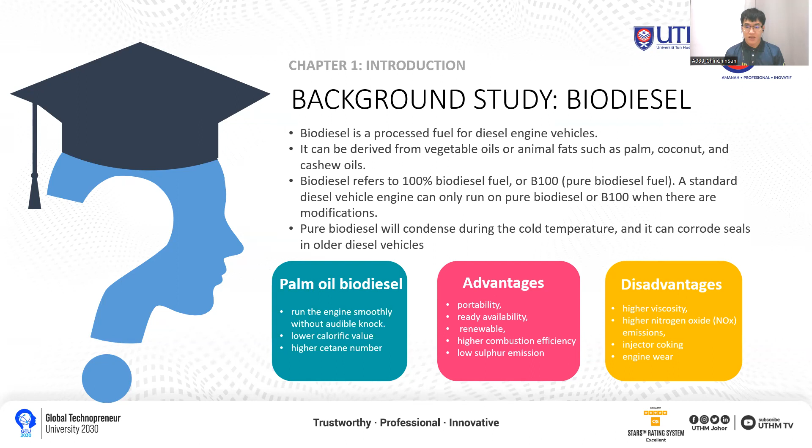Pure biodiesel will condense during cold temperature and can corrode the seals in older diesel vehicles. So the biodiesel that we use in our diesel engine vehicles is called biodiesel blends. It can run the engine smoothly without audible knock, but it has lower calorific value and higher cetane number. The advantages of using biodiesel blends are portability, ready availability, renewable, higher combustion efficiency, and low sulfur emissions. The disadvantages are higher viscosity, higher nitrogen oxide emission, injector coking, and engine wear.

First is the problem statement. A unique frequent stop and slow moving traffic in Malaysia need a clear understanding of vehicle behavior under these circumstances, meaning the vehicle always operates in low load condition. Next is alignment with the National Automotive Policy (NAP) to introduce B30 biodiesel in Malaysia by 2025. So we need to know if B30 is ready to use in Malaysia.

So the research objective is to investigate the performance and exhaust emission by using B10 and B30 palm oil biodiesel blends under low load conditions.

So the scope: first, we're using the chassis dynamometer Mustang AWD 500 in Unitech. Second, we run the vehicle below 40% engine load with constant 40 km per hour speed. The fuel that we use is B10 and B30 palm oil biodiesel. The vehicle is Mazda CX-8 2.2 liter with SkyActiv D technology.

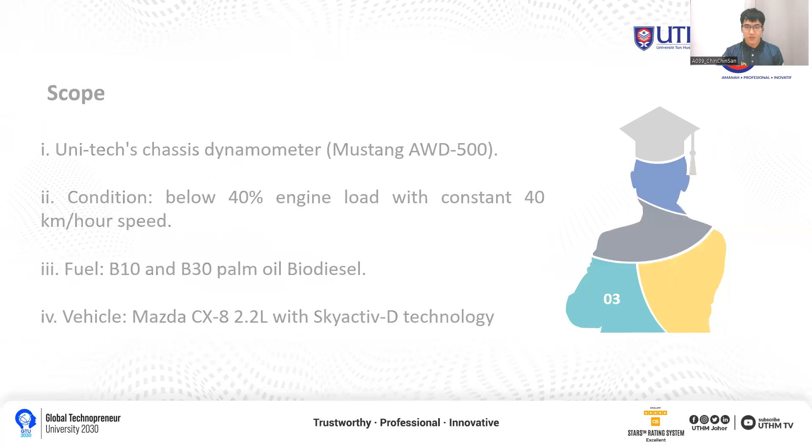The significance of study: first is the performance for B10 and B30 palm oil biodiesel blends under low load condition can be studied. Second is exhaust emission for B10 and B30 palm oil biodiesel blends. And lastly is comparison between the performance and exhaust emission under these two types of biodiesel blends.

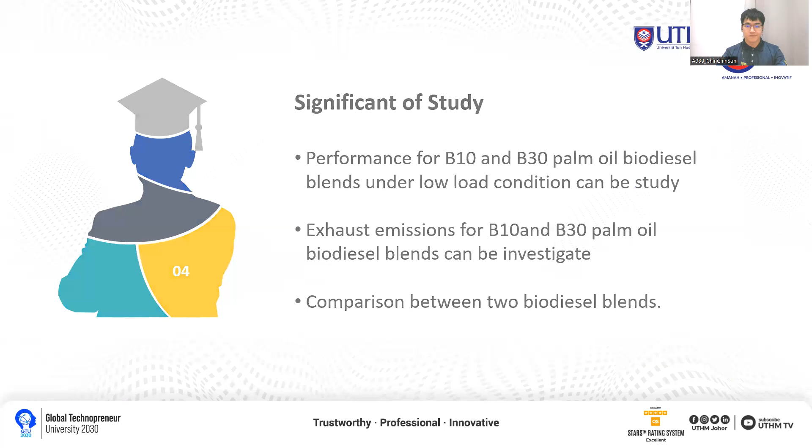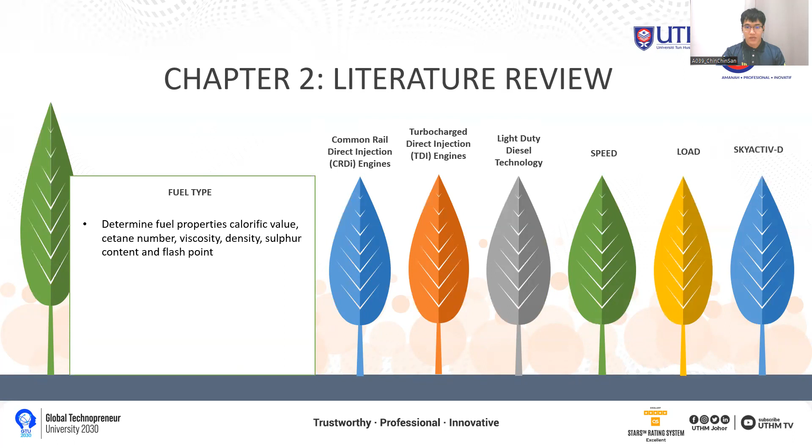So for the literature review, for the fuel type, to determine the fuel properties: calorific value, cetane number, viscosity, density, sulfur content, and flash point. How can these fuel properties affect the engine performance and also the exhaust emission? Next, we study about some vehicle technologies.

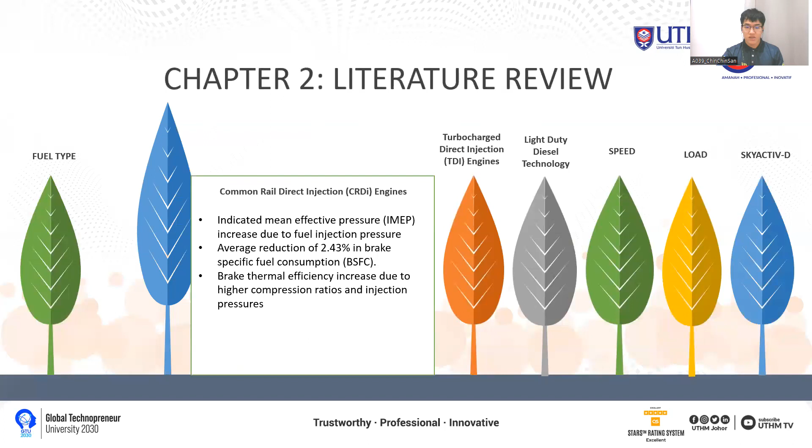First is CRDI engines. So IMEP will increase due to fuel injection pressure. Average reduction of 2.43% in BSFC, and finally brake thermal efficiency will increase due to higher compression ratio and injection pressure. For the turbocharged direct injection engines, low heating value of biodiesel increases the BSFC of the engine. And the total particle number concentration decreases when we use biodiesel blends in TDI engines.

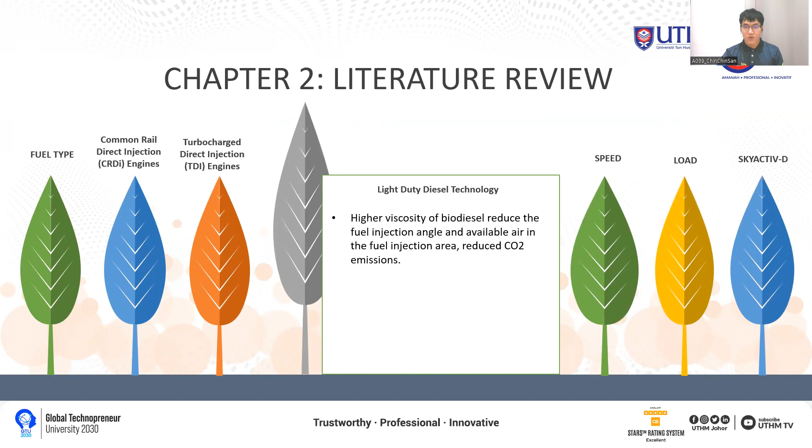For the light duty diesel technology, higher viscosity of biodiesel will reduce the fuel injection angle and available air in the fuel injection area, which can reduce CO2 emissions. Under the speed conditions, when the engine speed increases, brake power, brake thermal efficiency, and brake torque will increase. Higher emission of HC and NOx at lower speeds for all biodiesel blends.

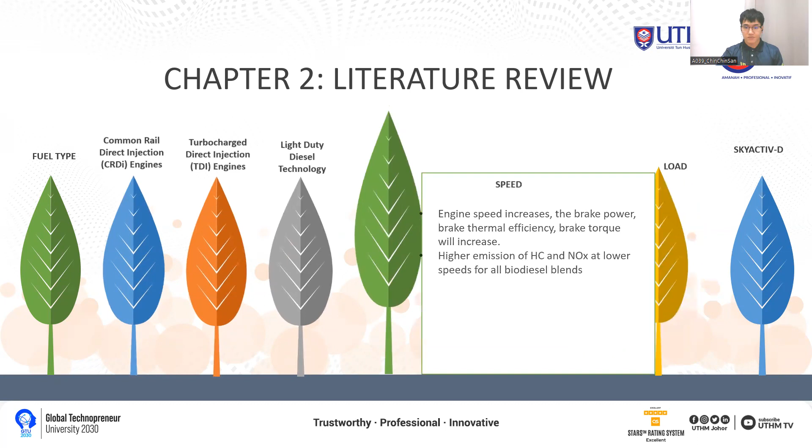For the load condition, when the vehicle is in high loads, it will increase the air-fuel equivalence ratio resulting in an excess of oxygen, which can lead to more complete combustion and improvement in engine output power. So under low engine load, the specific fuel consumption (SFC) values for biodiesel mixtures are lower than pure diesel fuel. So the emission of carbon monoxide will show a decreasing trend from 0 to 75% load.

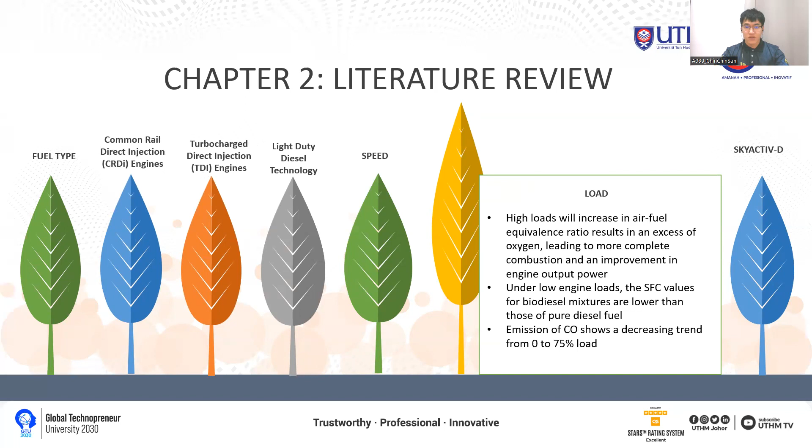Lastly, we study about the SkyActiv D technologies. It has the lowest compression ratio, 14 to 1, for 20 to 30% better fuel efficiency. So with the SkyActiv D technologies, the vehicle does not use the expensive NOx after-treatment system. It has a new two-stage turbocharger for smooth and linear response. Precise injection quantity and timing increase the accuracy of mixture concentration control and ensure cold start capability.

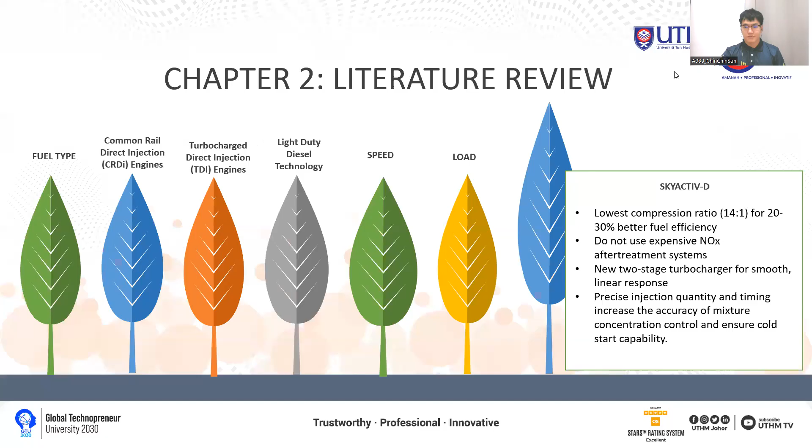So this is some references for my literature review.

So the methodology I divide into 4 sessions. First one is materials and equipment. First one, of course, is the fuel properties for B10 and B30. We more focus on density, viscosity, cetane number, and calorific values for the fuel.

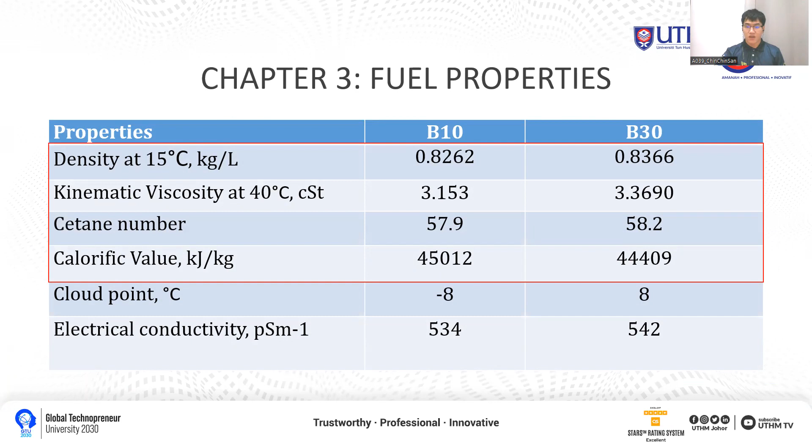Next is the vehicle that we use, Mazda CX-8 with SkyActiv D technologies. This is the engine's specification, and this is another specification of the vehicle. So the engine displacement for CX-8 is 2191 cc with compression ratio 14.4 to 1.

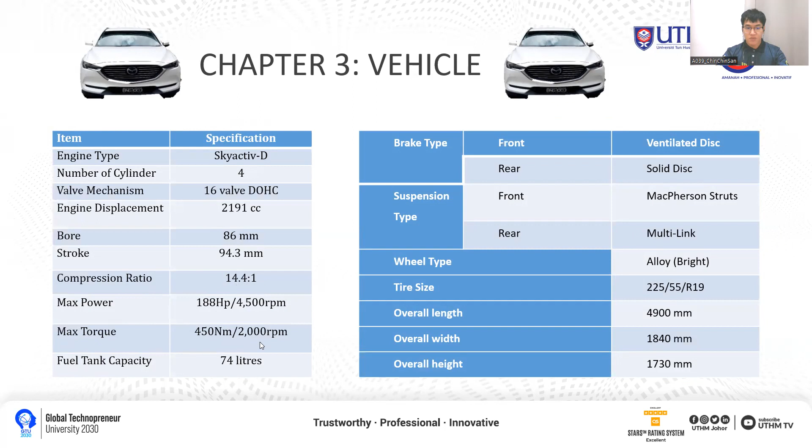The max power is 188 horsepower at 4,500 RPM, and the max torque is 450 Newton meter at 2,000 RPM.

So these are the other apparatus that we use in this experiment. First one, the B30, we can only manually blend because we cannot directly get the B30 palm oil biodiesel from the open market. So we use the biodiesel blending machine to blend between B100 and B10 Euro 5 that we get from Caltex in Pagoh.

Next, we use the Mustang dynamometer all-wheel drive 500 model. Next, we use the KINGBOLEN Bluetooth OBD2 with the aid of Torque Pro application. Next, we use the Bosch BEA 060, which is the exhaust gas analyzer, with the aid of BEA 030 speed measurement, and KTS 515 OBD.

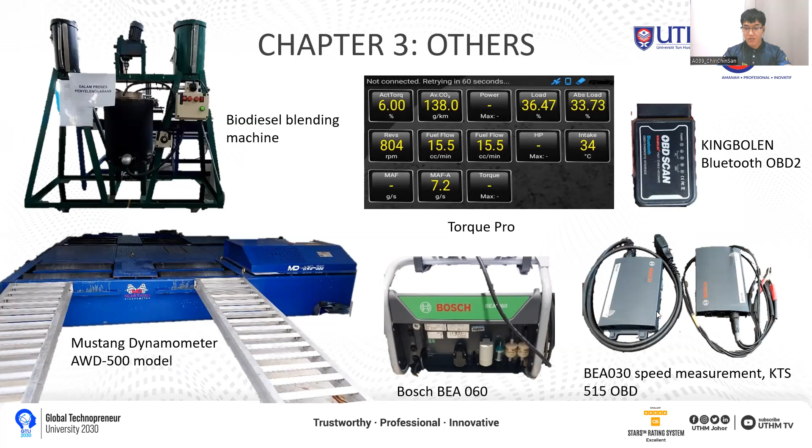So the experiment setup for the pre-experiment checklist, we need to ensure all the components of the Mustang dyno are in good condition. Next, we need to check the vehicle condition such as tire health, tire pressure, engine and transmission oil, plug, belts, and hoses is in good condition.

Next, we need to identify and list the parameters in Torque Pro that need to be logged during the experiment, such as RPM, engine load, fuel flow, and the others.

So next, we need to study the guideline or the manual for the chassis dynamometer software, PowerDyne, emission gas analyzer, and the specific vehicle under testing. Next, we need to ensure all the tools are sufficient in quantity, functionable, and properly connected to facilitate a smooth and accurate experiment.

So next, we need to have good PPE, such as wearing earplugs and safety shoes during running the experiment.

After we check all this, we can park the car on the dynamometer. Then we need to ensure it is centered and straight, and implement cross strapping at suitable points to prevent unnecessary movement when the experiment is running. Finally, we utilize dyno fans to dissipate engine heat effectively during the test.

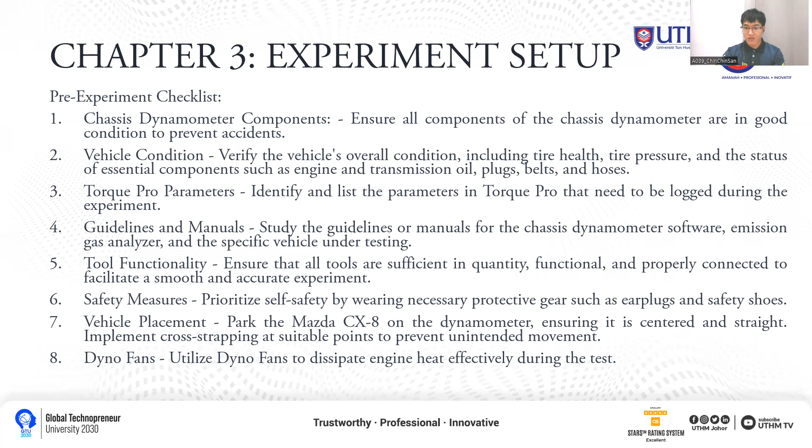During the experiment, we need minimum 3 people: one to operate the vehicle, one to monitor the dyno computer, and lastly one to record and monitor the emission gas analyzer computer.

So we start with the B10 palm oil biodiesel blend first. To run the vehicle under low load conditions, we need to maintain a constant speed of 40 km per hour that can be set at the dyno application.

Next, set the engine load manually to 20% using the Torque Pro through the OBD2. Sustain each load for 10 seconds with a data collection interval of 0.5 seconds.

We gradually increase the load to 25%, 30%, 35%, and lastly 40%, maintaining each load for about 10 seconds. Record the brake power using the PowerDyne software for the dyno, then we collect the engine RPM and fuel flow through the Torque Pro for BMEP and BSFC calculation.

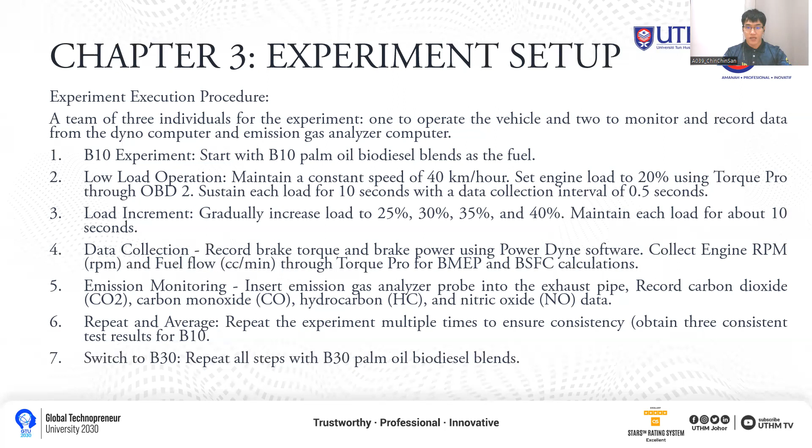This is some results that I took from the Mustang Dyno. As you can see, this one is at 20%, 25%, 30%, 35%, and 40%. The color determines the different tests that we ran, and it's very close and consistent.

So we'll take the 3 data points for these 3 tests. This is for engine power and engine torque.

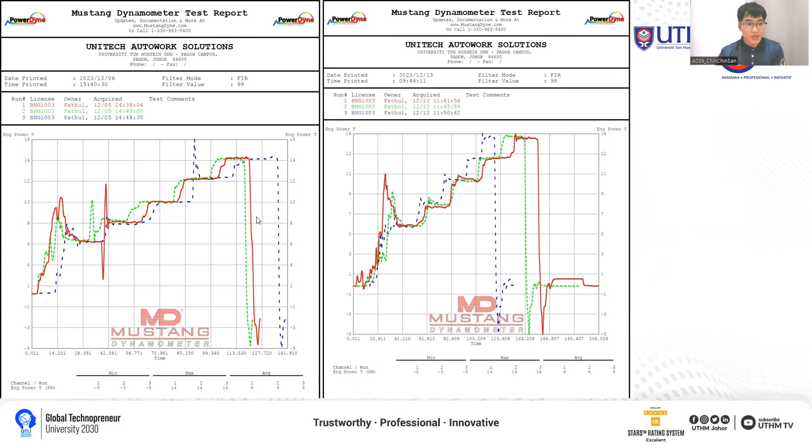So for the data analysis, firstly we use the Excel spreadsheet. We format the collected data into an Excel spreadsheet for organized analysis, emphasizing the key parameters critical for performance and emission assessment.

We need to calculate the average value for brake torque, brake power, CO, CO2, HC, and NO under different engine loads.

And we use the formula BMEP to calculate it. To calculate the BMEP, we need the torque T, N, engine displacement equal to 2191 cc, and N is equal to the number of revolutions per power stroke, where for four-stroke engines N is equal to 2. To calculate the BSFC, we need fuel flow and the brake power.

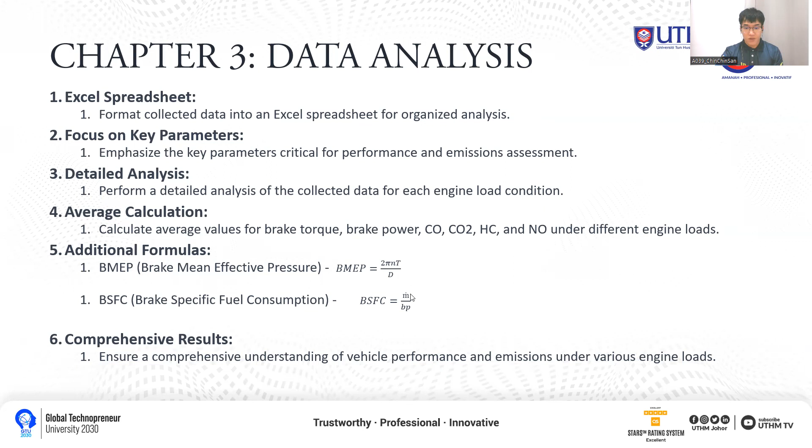So lastly, for chapter 3 is uncertainty, which is the error and uncertainty that may arise from diverse factors such as selection, calibration of instrument, fluctuation, and environmental conditions, variations in test and observation.

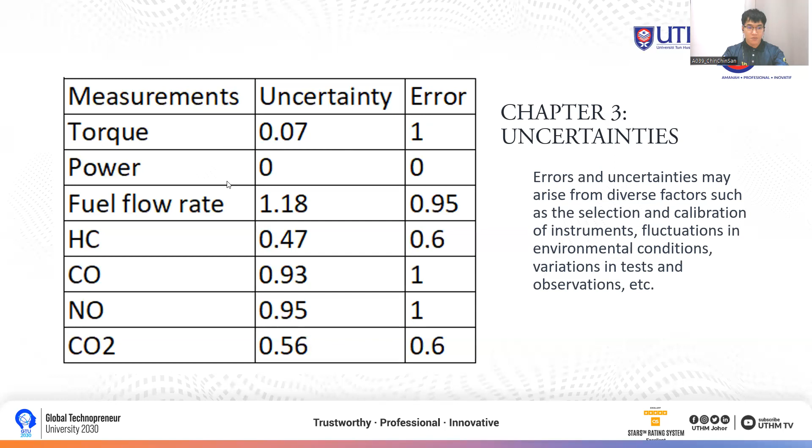This is the uncertainty and error that we calculate: the brake power, fuel flow rate, HC, CO, NO, and CO2.

So this is the flowchart. First, we start with data gathering and we set up the chassis dynamometer to run the experiment. Can it proceed? If yes, we'll run the experiment with low load conditions and take the result, and lastly we finish the report.

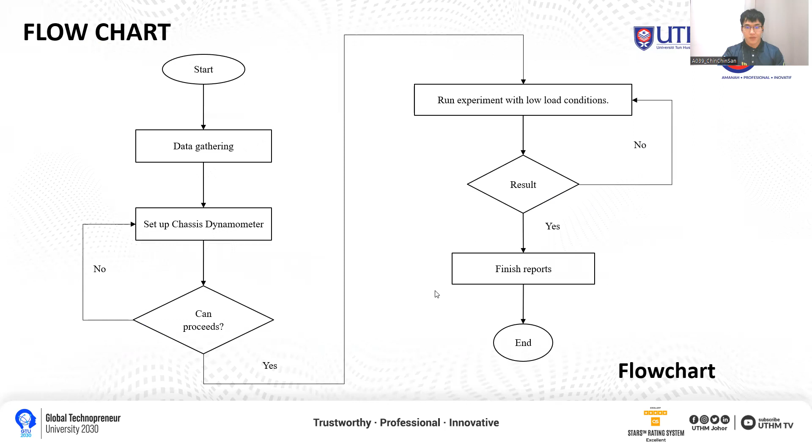So this is the vehicle performance. For the brake torque analysis, the brake torque has an increasing trend when the engine load increases. At 40% load, both B10 and B30 exhibit the highest brake torque value.

So the difference between B10 and B30 at 40% load is about 2.34 Newton meters, where B30 is lower than B10. The lowest brake torque value occurs at 20% load for both fuels.

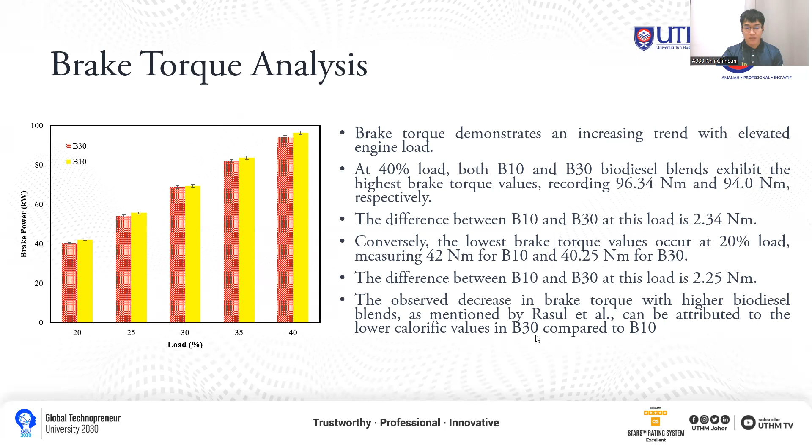So the observed decrease in brake torque with higher biodiesel blends, as mentioned by Rasul et al., can be attributed to the lower calorific values in B30 compared to B10.

For the brake power, it increases when the load increases for both B10 and B30 biodiesel blends. At 40% load, the peak power recorded is 14 kilowatts for both blends, and the lowest brake power is at 20% load.

So the small difference in calorific values and dynamometer sensitivity results in negligible variations between B10 and B30.

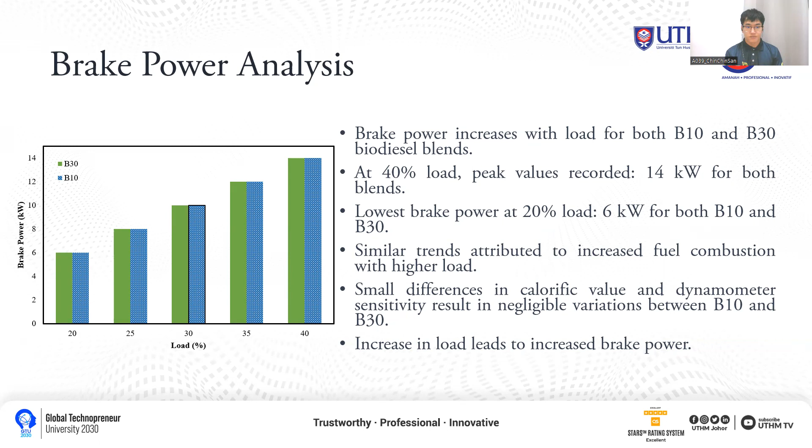So for the BMEP analysis, BMEP will increase with load for both B10 and B30 biodiesel blends. At 40% load, the peak value recorded for B10 is 552.61 kilopascal, and for B30 is 539.20 kilopascal. The difference between both fuels at 40% load is about 13.41 kilopascal.

So the BMEP will decrease with higher biodiesel blends due to the lower energy content, higher viscosity, and also the lower brake torque. Because the formula we use to calculate the BMEP needs the brake torque, so when the brake torque decreases, the BMEP will also decrease.

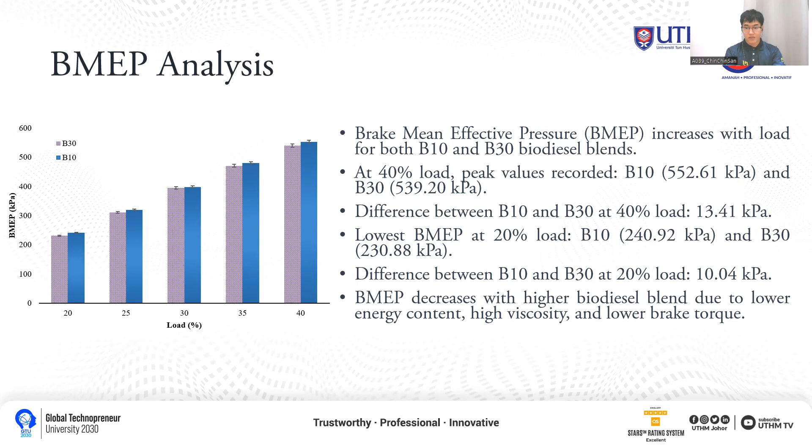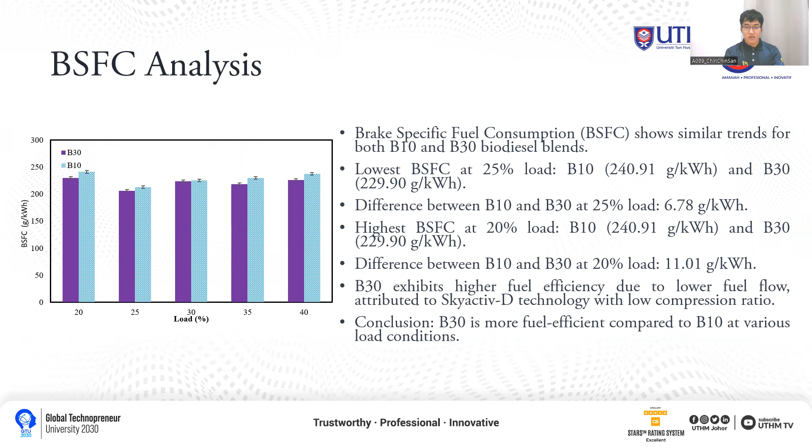So the B30 exhibits higher fuel efficiency due to the lower fuel flow, attributed to SkyActiv-D technology with low compression ratio. So in conclusion, B30 is more fuel efficient compared to B10 at various load conditions.

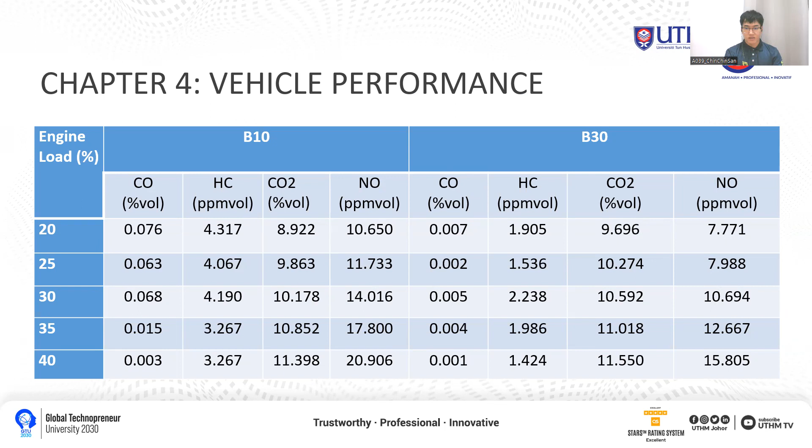Next is for the vehicle performance. This is the data. For CO2, the percentage volume will increase with load for both B10 and B30 biodiesel blends. At 40% load, the peak value recorded for B10 is 11.398 percentage volume and B30 is 11.550 percentage volume. The difference between B10 and B30 at 40% load is about 0.152% volume.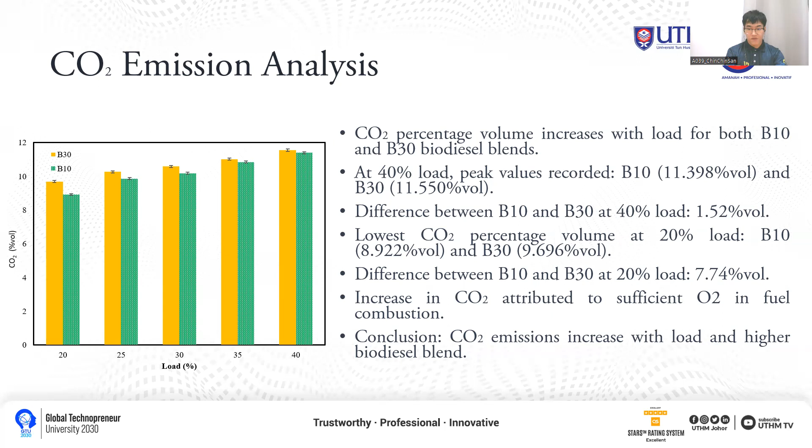So the increase in CO2 may contribute to sufficient oxygen in fuel combustion.

For the CO emission analysis, the CO percentage volume shows a decline trend from 20% to 25%, followed by an increase at 30% and a final decrease at 40% for both B10 and B30 biodiesel blends. At 40% load, lowest CO percentage volume recorded for B10 and B30. The difference between the two fuels at 40% load is about 0.002% volume.

The presence of sufficient oxygen reduces the carbon monoxide emissions, aiding in better combustion when the engine load increases. So in conclusion, CO emission will decrease with load, and higher biodiesel blends cause a decrease due to higher oxygen content.

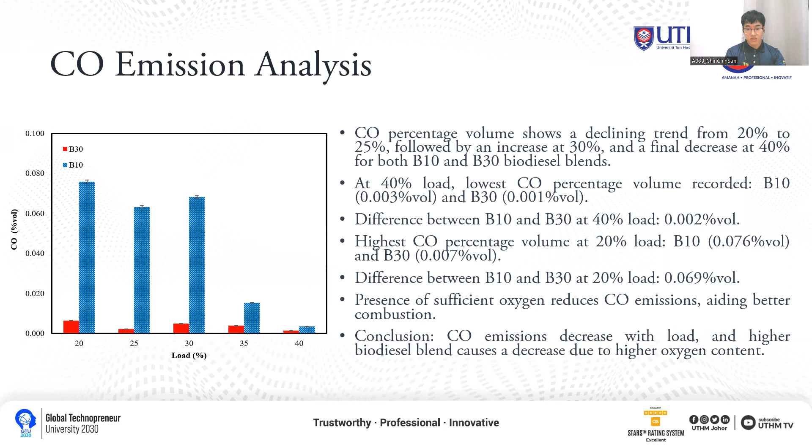Next is HC, hydrocarbon percentage volume, exhibiting similar trends to CO. The highest HC value is at B10 at 20% engine load with 4.317, and B30 is at 35% engine load with 1.986 ppm volume. So the maximum difference between HC values is about 2.331 part per million volume.

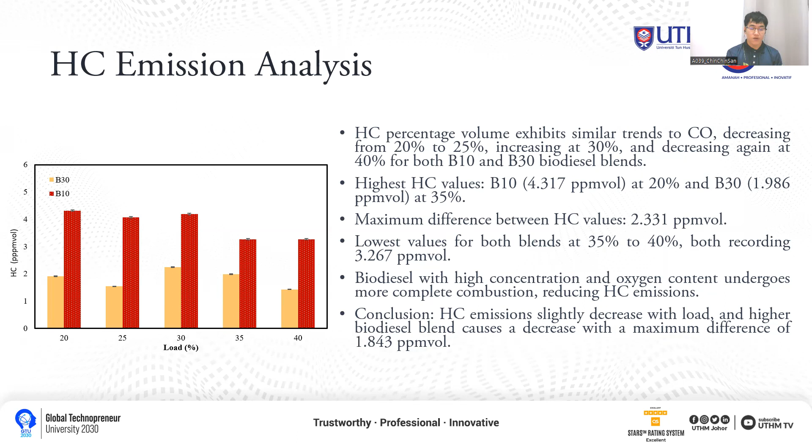So biodiesel with higher concentration and oxygen content will undergo more complete combustion, reducing the HC emission. So in conclusion, HC emission will slightly decrease with load, and higher biodiesel blends cause a decrease with a maximum difference of 1.843 part per million volume.

Lastly is for the NO emission analysis. The NO emissions will increase with load for both B10 and B30 biodiesel blends. At 40% load, peak values recorded are 20.906 part per million volume for B10 and 15.805 part per million volume for B30. The difference between B30 and B10 at 40% engine load is 5.101 part per million volume.

The lower compression ratio in SkyActiv-D technology will delay the combustion, which allows more even air fuel mixing and reduces NO formation. So conclusion is NO emission will increase with load, but higher biodiesel blends cause a decrease due to SkyActiv-D technology's NO reduction.

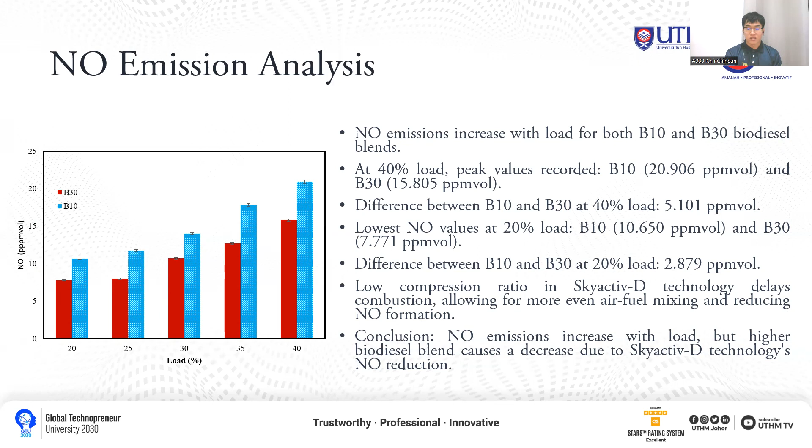So for the conclusions: conclusion for comparison between engine load, the experiment used B10 and B30 palm oil biodiesel blends to test the Mazda CX-8 2.2D performance and exhaust emission under low load conditions. From the experiment, vehicle performance such as brake power, brake torque, and BMEP will increase when the engine load is increased for both biodiesel blends used.

And the lowest BSFC value is at 25% engine load for both biodiesel blends fuel used. The percentage volume of CO2 and part per million by volume of NO and HC show decreasing trends for both biodiesel blends. The percentage volume of CO shows the increasing trend.

For the comparison between B30 and B10, the vehicle performance for B30 will show decreasing trends, except for brake power, which has similar brake power between B10 and B30, and decreasing CO, HC, and NO emissions can be due to the sufficient oxygen in the combustion chamber with the aid of SkyActiv-D technology.

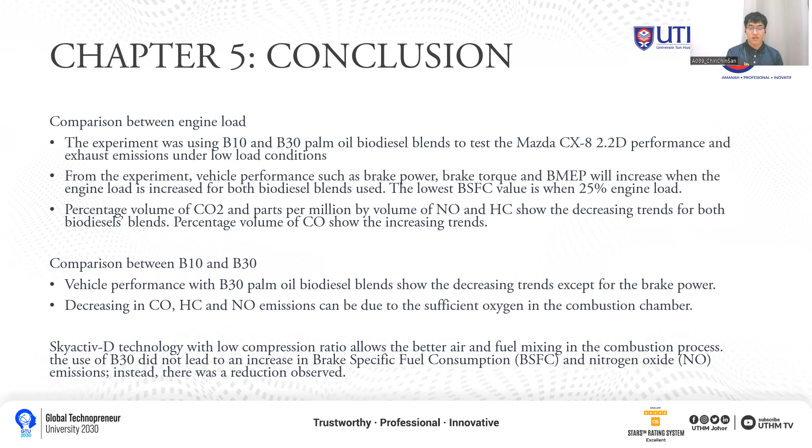So SkyActiv-D technology with low compression ratio allows better air and fuel mixing in the combustion process. The use of B30 did not lead to an increase in BSFC and NO emissions as expected, but there was a reduction observed.

Some recommendations for this experiment. First is determine the exact speed of the Mazda CX-8, because during the experiment we just manually set 40 kilometer per hour speed. So we need to determine the exact speed by identifying the specific low engine load condition by conducting an in-depth analysis of real-world driving conditions.

Next is to conduct the experiment using a chassis dynamometer with the constant force method, as opposed to relying on a constant speed approach. This is because the first challenge is the constant force malfunctioning in the chassis dyno that I used in this experiment. So it's better if we can use the constant force method compared to constant speed in this experiment.

Next, we can expand the range of palm oil biodiesel blends used in the test to provide a more comprehensive evaluation of the performance and exhaust emission of the Mazda CX-8 with SkyActiv technology.